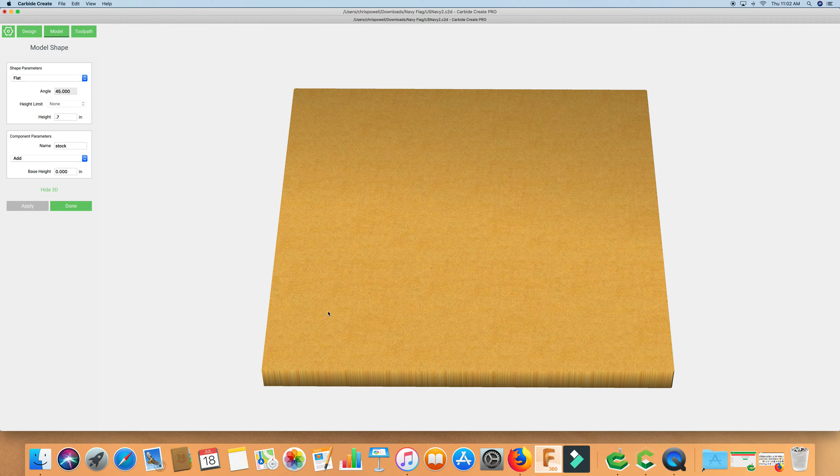So apply. Now we can click show 3D, and you can just see that we've got our 11 by 11 by 0.7 inch thick piece of wood there. Now you want to make sure that you click done, because any other changes that you made would happen to that.

So the next one we're going to do is go back to design and ungroup that. We're just going to select this outside circle. We'll go back to model, click shape, and again we're going to do flat.

Our height is going to be 0.25, and we want to make sure that we're on subtract here. So this is going to subtract from this outside piece of material that we already made, which has a height of 0.7. So we're just going to subtract from that material there.

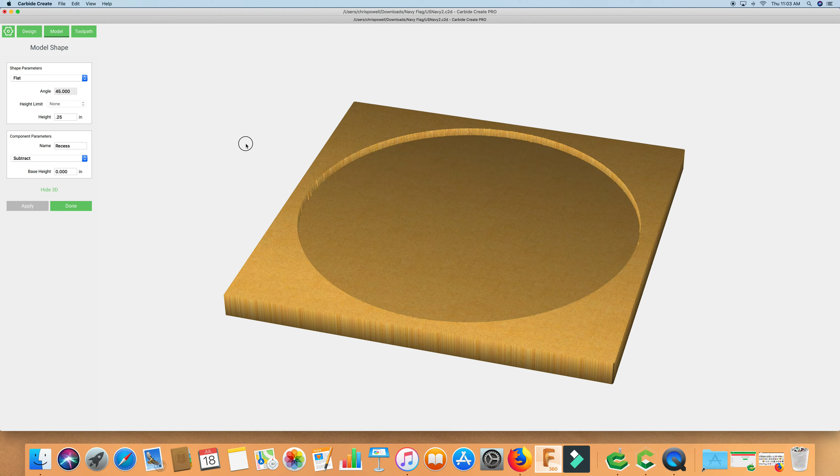Again, we'll name that. We'll just name that recess. Click apply, and we can go show 3D, and then you see that we're coming down about 1/4 of an inch there. So now we've got our recess. Again, we'll click done. Go ahead and save again.

Hide 3D. Now we need to get all this detail in there. And to do that, let's go ahead and select all of this. And we're just going to unselect that outside because we already have that part in. And basically everything that we've got here that's selected, we're going to now add back in to the recess that we put.

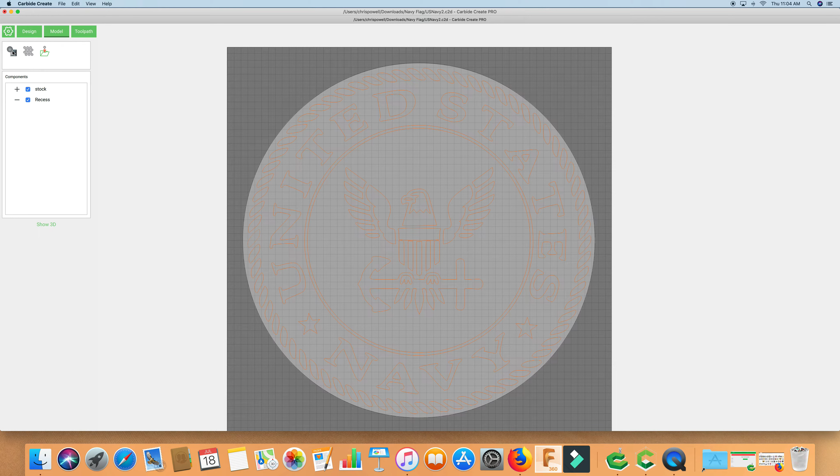So again, we'll come to shape. Alright, so you can see everything that we've got selected there. We're going to do this round this time. Alright, so we're on add, and we want our height to be 0.2. Go ahead and apply that.

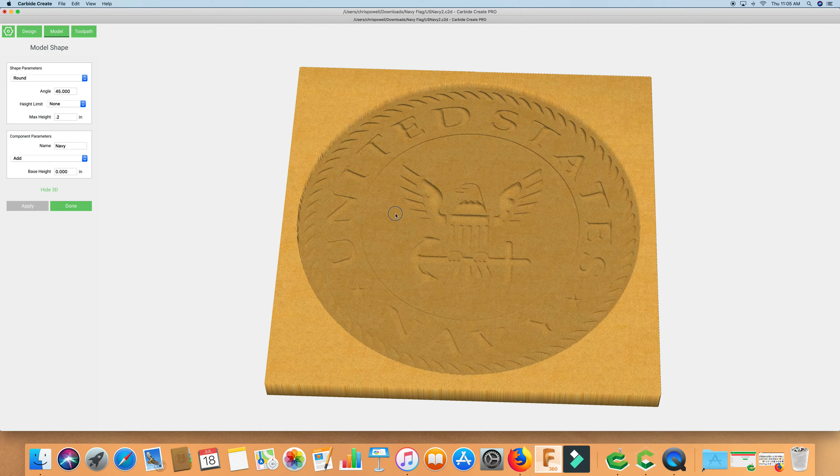And let's click show 3D. See, now you can see we've added back in all those details there, and they're coming up out of that recess. Click done, and you can see here our stock's got a plus because we added the recess, a minus, and then again back to the rest of the logo, we've got a plus because we're adding back in that material. Save that. You can say hide 3D.

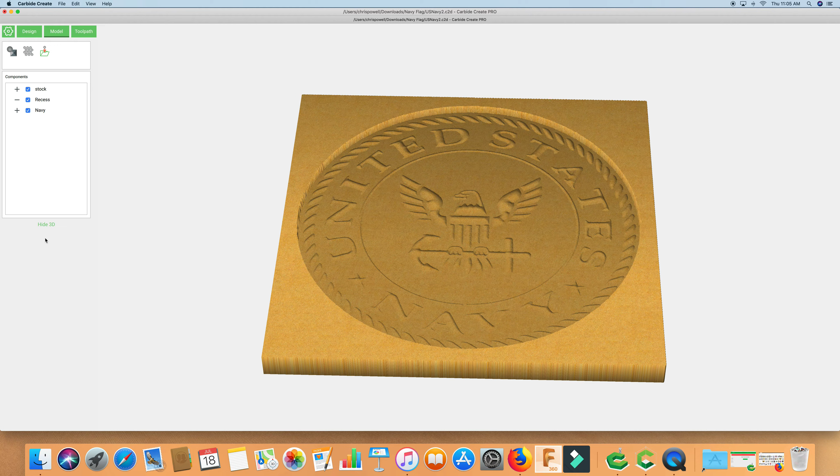All right, now the really hard part, we're going to make the toolpath. So we'll click this toolpath here. We're going to click just this outside circle. We don't need to worry about any of the rest of this. We click that, and we're going to hit 3D finish.

Now to rough this in, I'm going to use a 102, which is a 1/8 inch end mill. It's just a flat end mill. I don't have any other ones to use right now. A ball would work well, but a flat end mill will work well also. So select that.

We're gonna make some changes to things here. So step over, that's fine. That's about, that's actually under half of the diameter of the bit. So we can leave that alone.

Feed rate, you can turn the feed rates up quite a bit. So let's try 60. And the plunge rate, we'll turn that up to 30. For angle, we'll just keep it at 0. And this is actually going to be our roughing. All right, and it gives us a time estimate of 32 minutes, which is pretty quick.

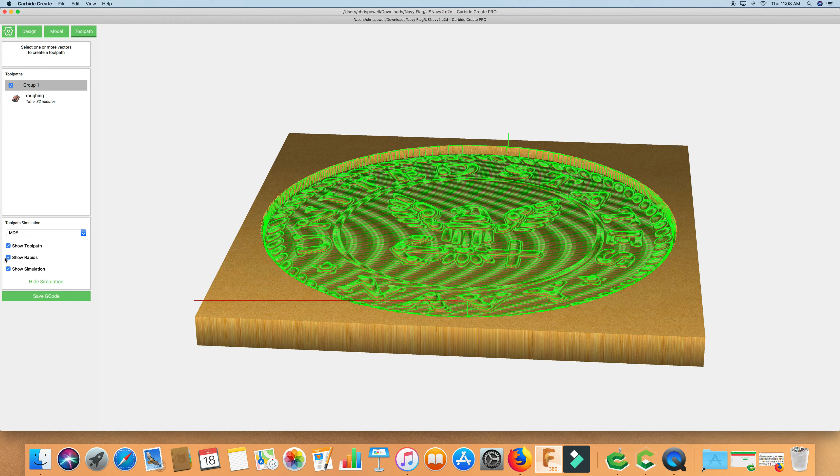So let's save it, take a look at that simulation. Turn our toolpaths off. So I was obviously joking when I said this is the hard part. All we did was select that outside circle, generate our 3D toolpath, and it does everything inside. So it really takes care of everything for you and makes it really easy.

So this is going to leave it a little rough. Even in the image here, you can see that it's kind of rough.

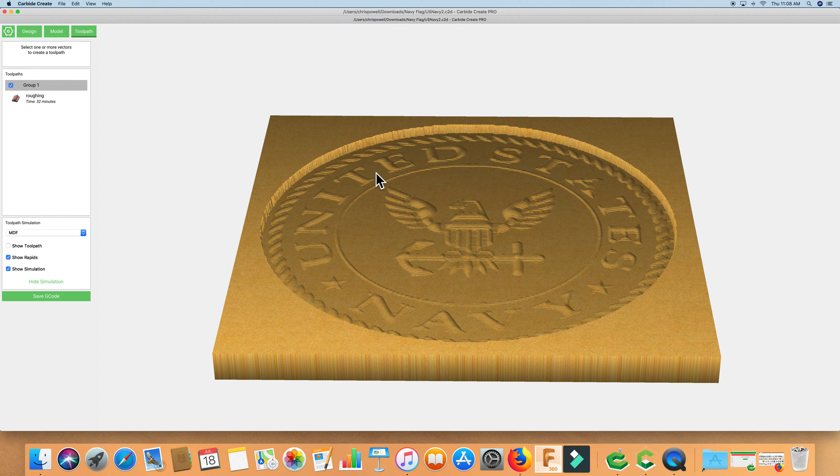All right, so now let's do a finish pass, and we'll just select this outside again, click 3D finish, and I have a 031 ball mill that I'm going to use for this. So I've got that selected already.

Set our speeds, which are our step over, I'm sorry. Let's do that 15, about half. Feed rate. We're not going to be removing a ton of material here because we've already removed most of it with the roughing pass. Put that at 80, and then our plunge at 40.

These are just speeds that I've come up with that seem safe, based on my experimentation. That one's going to take a little longer, but we'll probably turn it up from 100% to whatever we're comfortable with, so that'll run a lot faster. I'm using a really small bit there, which is overkill, we definitely don't need something that small, but it's just all I have right now. So let's save this again.

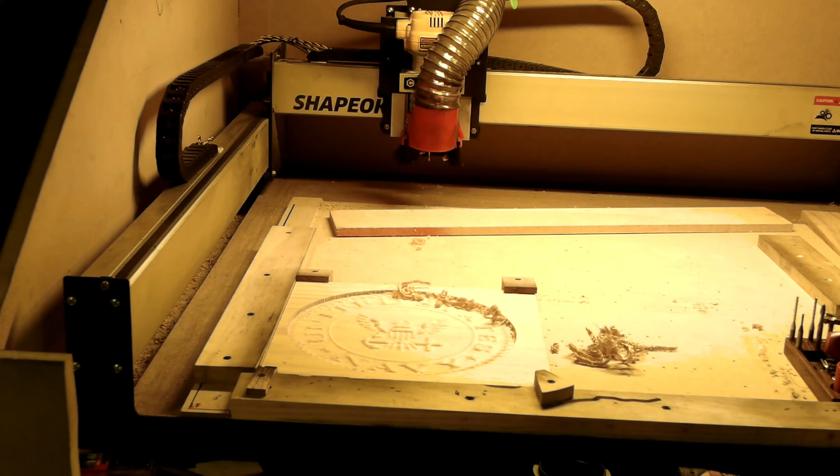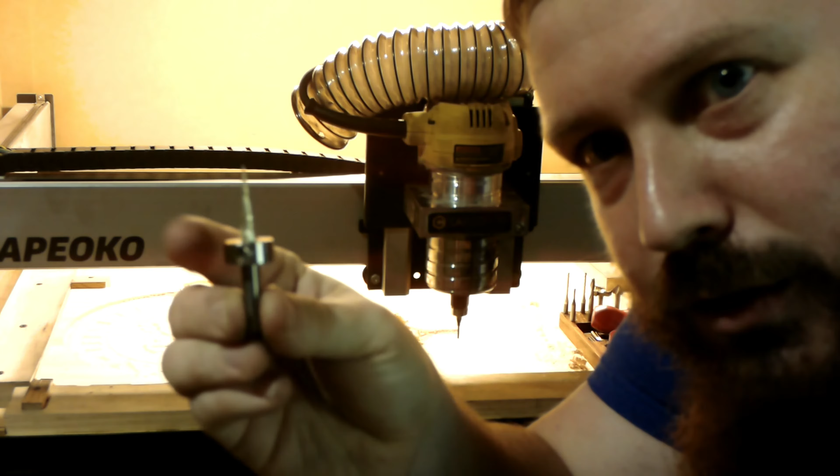Alright, so I'm going to do a bit change here. If you've watched any of my other videos, you know I run these collars. I've got a video showing exactly how I set them up. Because of this, I don't have to reset my Z height, so I'm just going to swap this out and then we can start right back up.

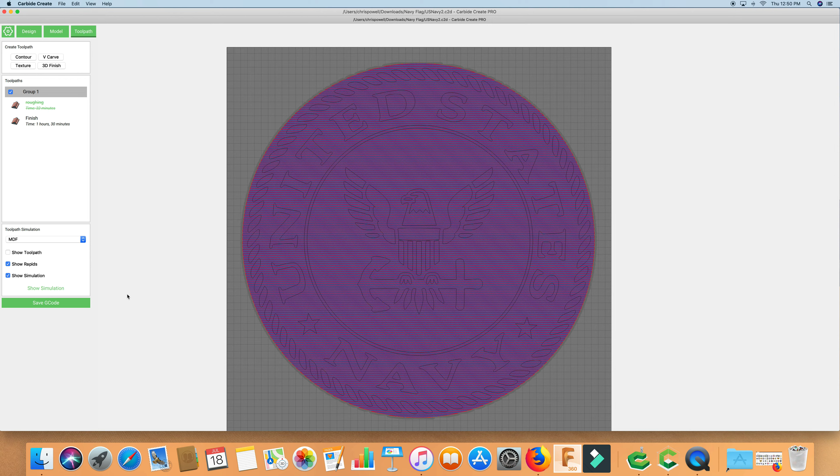So we'll run that. We've got our finish, go ahead and save that. All right, we'll just save this G code. All right, we'll go ahead and cut those out now.